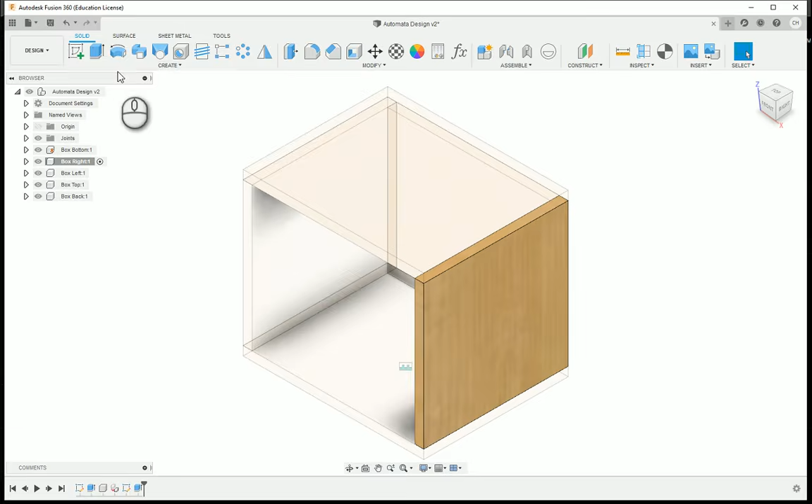So what I'm going to do here is find my box, and I'm going to say activate component, and I'm going to choose the hole command. From here, I'm going to select the side of the box. Now I'm going to turn to the right side here, and we have a diameter of 0.5.

What we're going to do is choose from our references. I'm just going to click on the edge. This needs to be 2 inches from the front, and then again, you don't want to go to the top there, you want to go to the top of the side piece, and this needs to be 2 inches. So centrally located in the side piece.

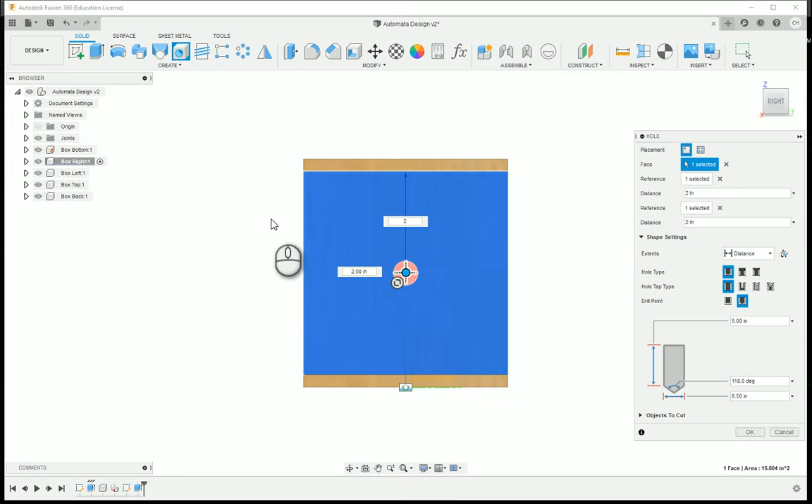And what I'm going to do here is, rather than say distance, I'm going to say through all, and it's actually going to end up, when you look here, going all the way through to the other side. So it's actually going to create a hole in the other component for us. And I'm going to say OK.

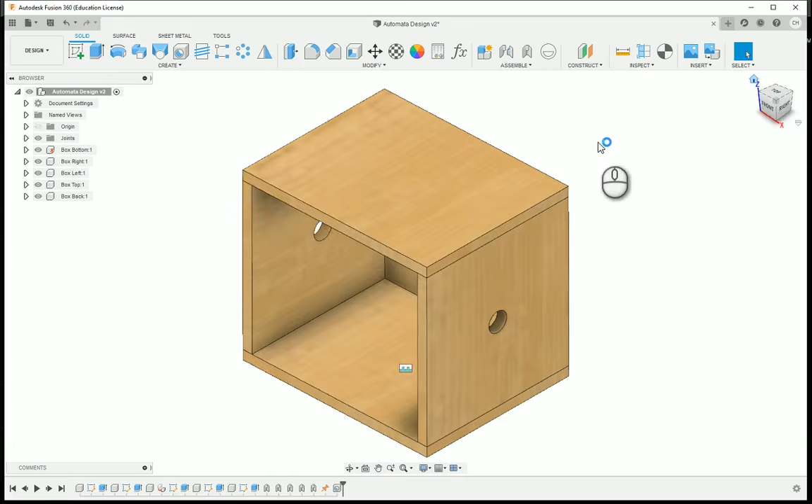So now I'm going to activate the top level. Here's our holes. And now I can start looking at bringing in some of our components we created. So let me open up my data panel, and I'm going to drag in the axle bushing and place it into our model.

I'm going to get this positioned. I like to get these positioned into place of how they would be assembled before I start doing any joints. That's because a lot of the snap points and everything, the joint origins will line up and everything's set up there. So I'm going to say OK.

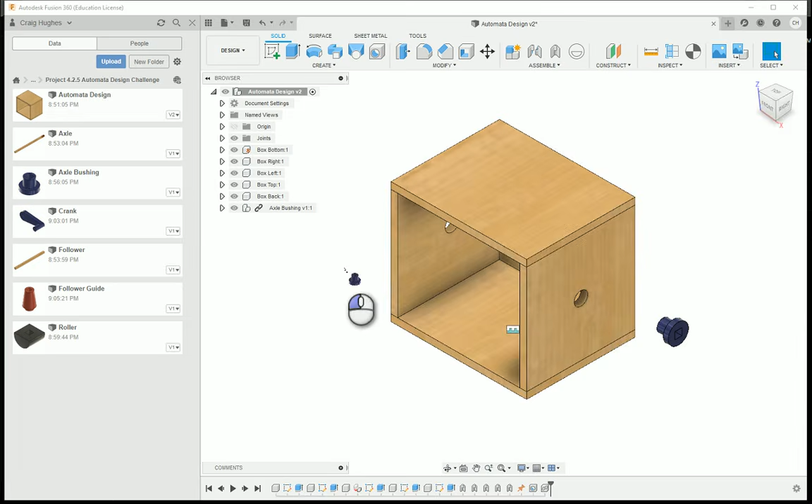And then I'm going to drag in another axle bushing. Now I can't move or copy in this file because these are separate design files. You're going to see this is kind of representative of a bottom-up modeling approach, because see the links there? That means these files were made in separate design files, whereas all the box parts are in one file. This is top down, and here this is going to be bottom up.

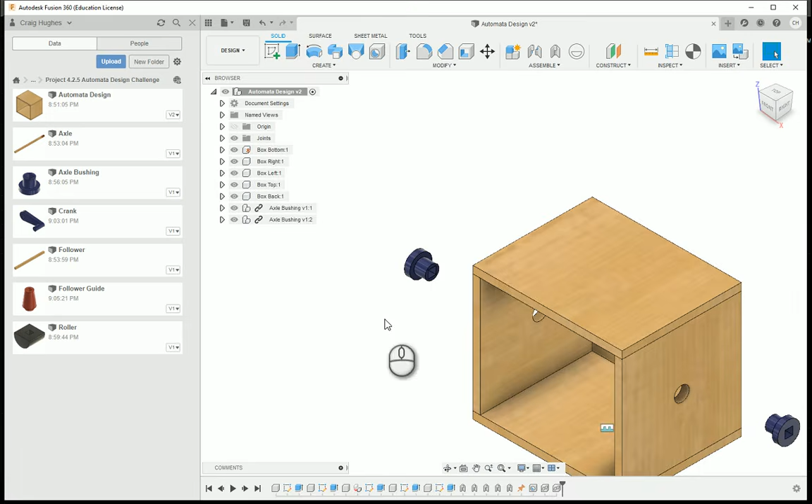So let's go ahead and try this out though. I'm going to do a joint, and I'm going to choose a revolute joint. Since these guys aren't put together, I don't want to use as-built joint. As-built joint is if I go through and model these in place where I want them.

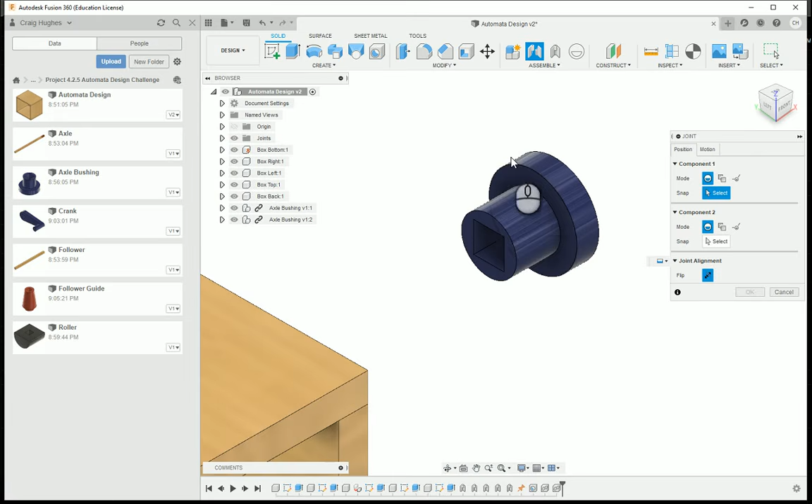For joint, I want to go ahead, and these are parts that are not put together. So I'm going to select kind of this black circle around the outside edge, and you'll see the joint origin chip will show up right there in directly the center of the hole.

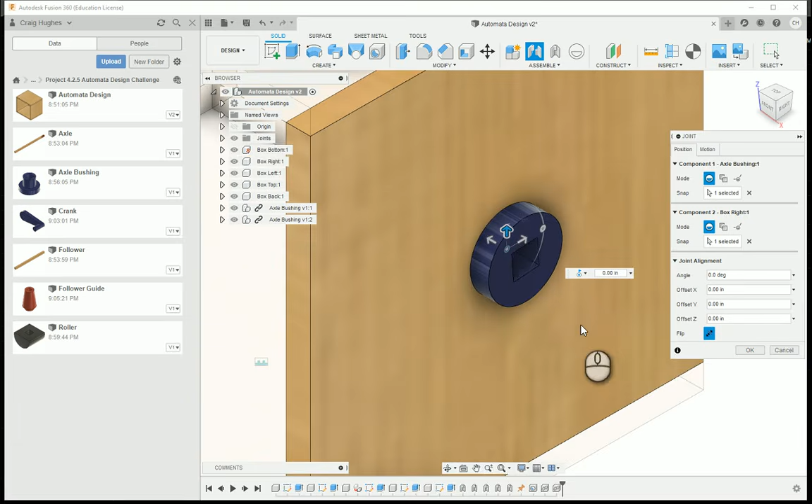And then what I'm going to do is I want that to be clicked right here, so then that goes. Now I'm going to change the motion. Either I can click on the tab in the dialog, or I can click this little shortcut menu, which I like to do, and I want to change that to a revolute joint. And I'm going to go ahead and say OK.

And I'm going to do the exact same thing with this axle bushing here. Choose the circle right around there, choose the outside edge. It's already going to say revolute joint, and we're going to be able to have that going.

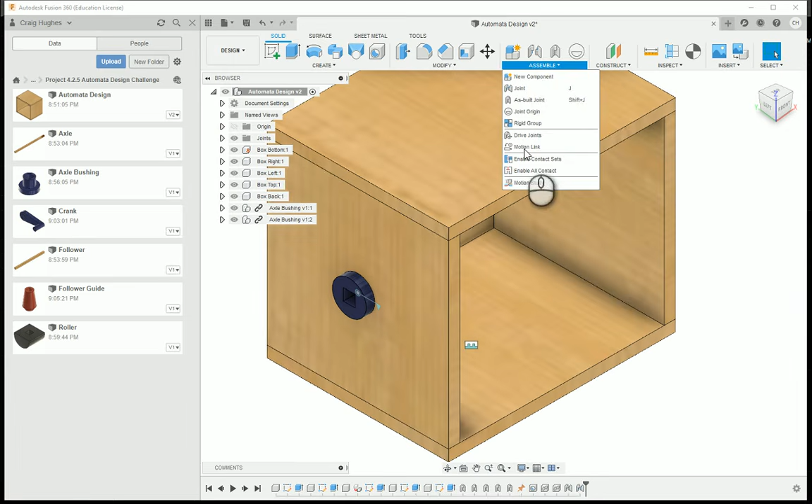And I'm going to say OK. Now, one thing I'm going to do while we're at this, before we forget, is under Assemble, I want to motion link these two revolute joints.

So I'm going to go ahead and click that revolute joint. I can click on the icon, or I can expand the folder and select the two right there. That way they're going to be turning in the same direction.

But you're going to see they're not necessarily, because they're flipped to each other. So a motion link may not be the best thing, but our axle is going to be brought in and going to help fix that for us.

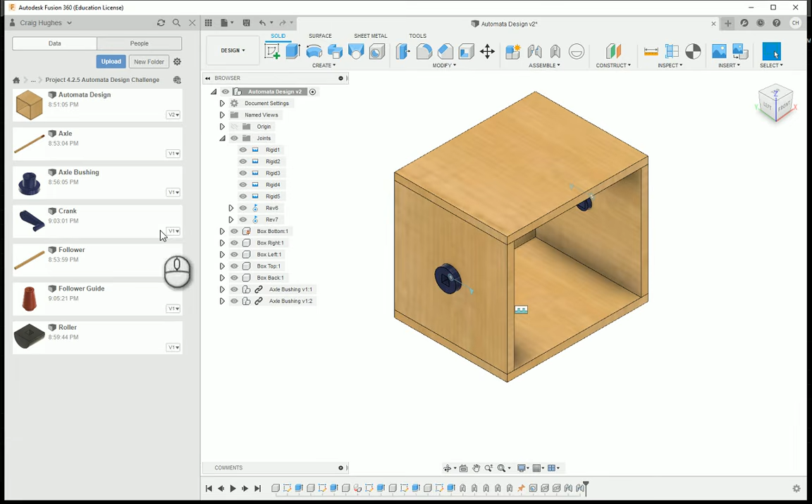So I'm going to go ahead and drag that in. Drag the axle in. Again, I want to kind of position it in the orientation that I'm going to install it. And I'm going to do this.

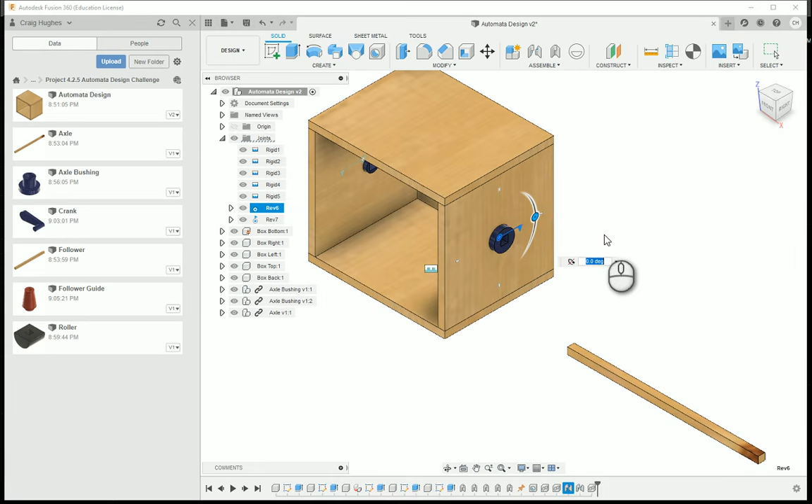Okay, so one thing I want to do with these revolute joints is make sure they're set at 0 degrees. That one looks good. I'm going to hit escape. This one looks good too. So you can click on any of the joint icons and edit them as well.

So what I'm going to do here is choose the joint. I want to choose the end point, let me do that one more time. I think the video, here we go. So I want to choose the very end point.

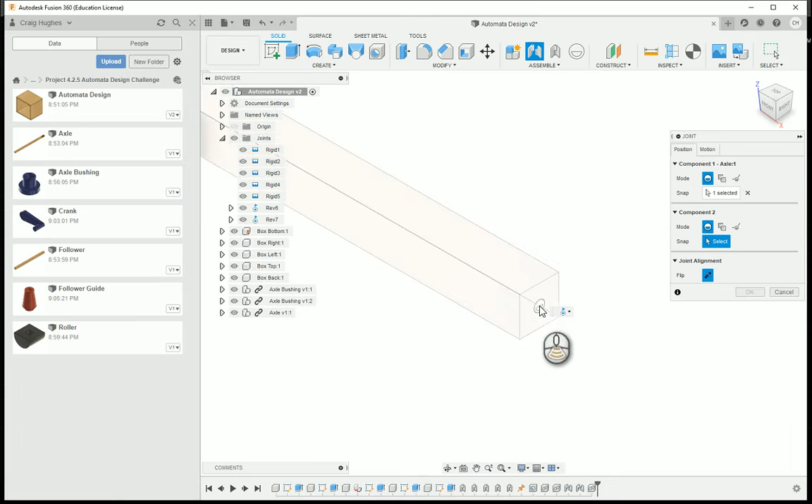You're going to see these little joint origin points, and I want to choose the very center on the end. I'm going to zoom out and find that on the hole. If I hover over this face, you'll notice as I move to the hole, it wants to try to pick these inside faces. I'm going to hold the control key, and that's going to lock down, so I can only pick these selections I'm kind of cycling through.

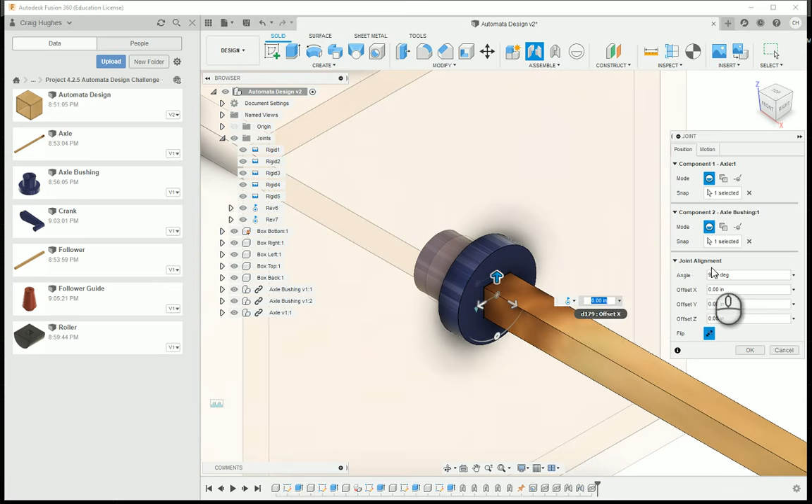And I want to find the corresponding one, which is right in the middle, and I'm going to go ahead and put that in there. Now you're going to notice I really don't want a revolute joint, I want it to be rigid. Now you'll see the axle is not inside, so I'm just going to hit the flip button and kind of flip that.

Now I'm going to turn this to the front before I accept it. I really want to make sure this is kind of even on both sides. So I'm going to go ahead and kind of drag this over.

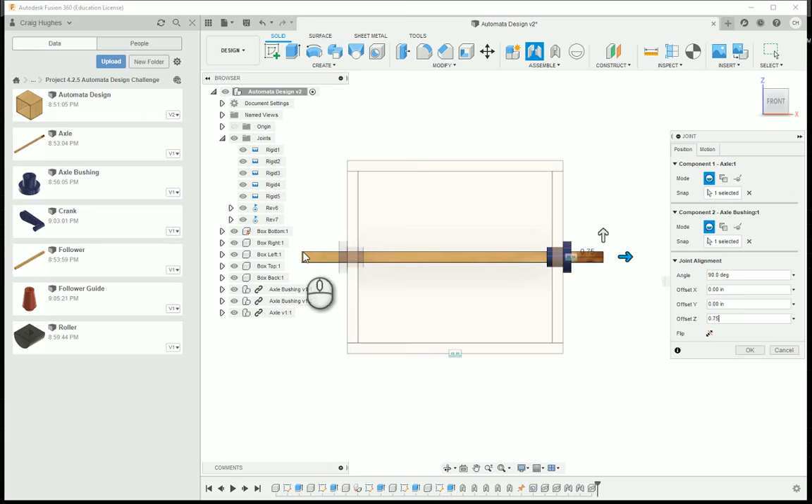I'm going to do an offset, and the offset usually I think is about 0.75. You can actually put in a little bit more. And actually that's not quite exactly even, but we can always adjust as well. And I'm going to go ahead and say OK.

So now here's what I can do: if I click and drag on this, you're going to see this one and this one are going to turn together, and then anytime I drag on the axle bushing, the axle turns. If I drag on the axle bushing, it will turn.

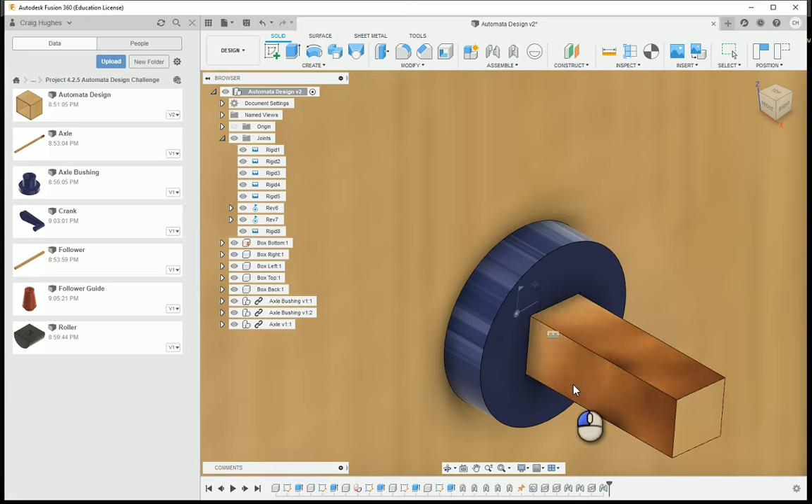So you'll notice that. Now let's go over to the other side. You'll notice it's not following with what we want. So here's the thing that I'm going to do.

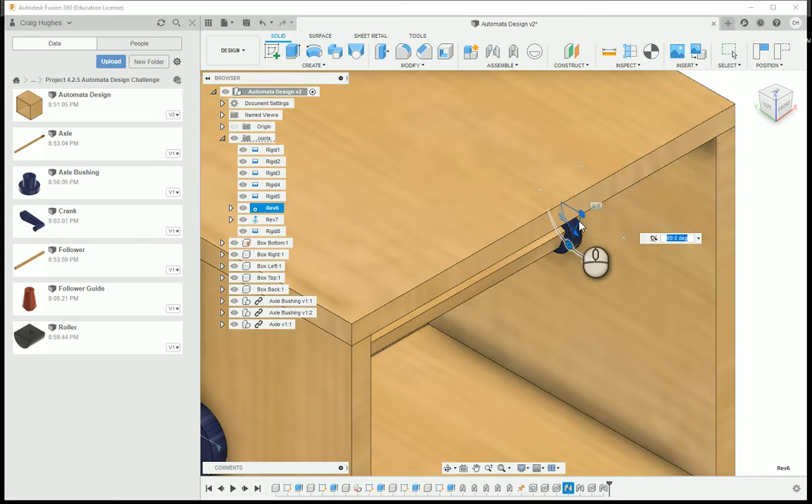Let me go ahead and set the 0 position for the revolute joint, and let me go over here to this one and set the 0 position there. Now here's the easiest thing to do - this is kind of doing a combination. Let's do the as-built joint.

Rigid, this axle bushing and the axle, and we say OK. Now you'll notice when I turn the axle bushing, these guys are stuck together, just like the other side. So it made it real easy for us.

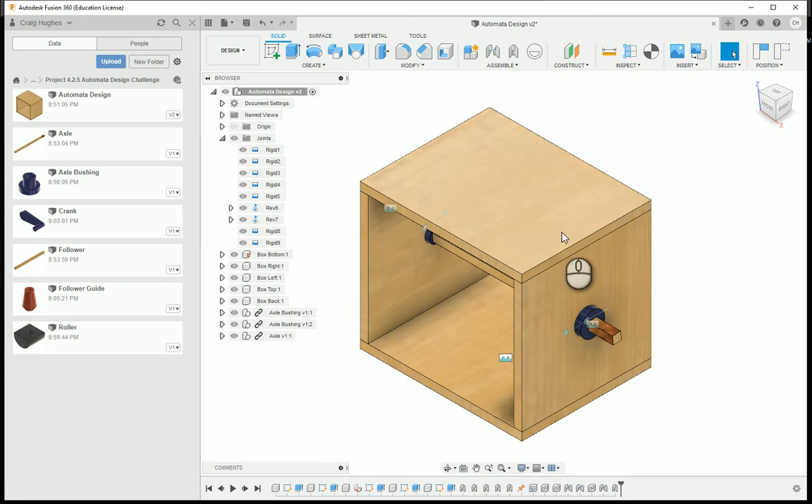Alright, so there's where we can go through and get that going. I'm going to go ahead and drag in also my crank handle, and it may take it a second to process to put the crank handle in. Let me go ahead and drag this in, and let me get this into the proper position.

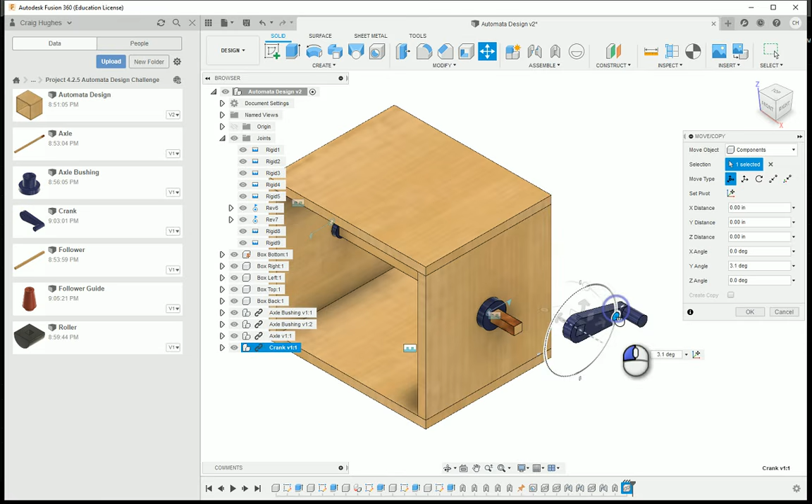The way I want this is I want the crank handle, when it's installed, to be in the lowest position. So I'm going to do it like this. I'm going to say OK. And here's what I'm going to do - I'm going to joint.

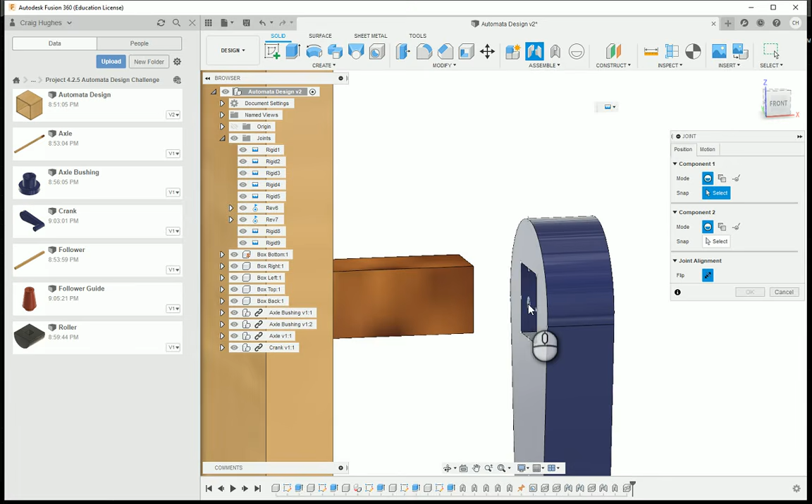I'm going to go ahead and turn this around, because the face that I want is actually this face. I'm going to hover over and choose the center of the hole like I did before, but I want to choose that back face.

So you'll see where the joint origin chip is, and then I'm going to go up here to the axle bushing. I want it to be right up against there, and even though the axle's in place, you can see I'm kind of snapping to the center. I want to click that same spot, and now that's going to put it right up against the axle bushing and go from there, and I'm going to say OK.

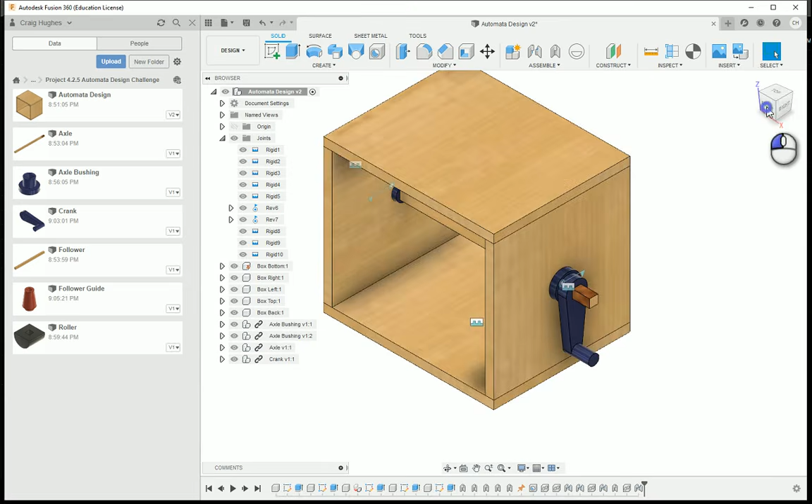So now here is our particular axle bushing and everything like that, and here we can kind of get a little bit of an idea of what we have.

Now 7 inches is probably a little bit too much on the axle, so I'm going to measure this, and see, okay, what's from this point to the outside edge on that point. The only thing is it gives me a diagonal line.

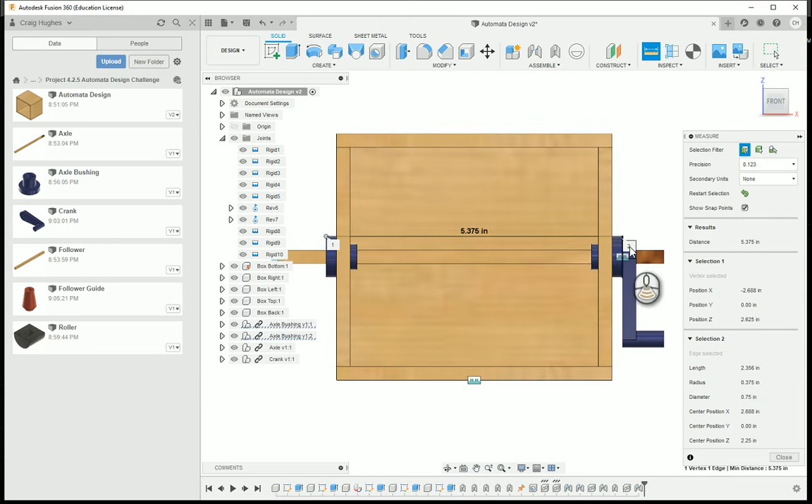So let me restart. Let me click this corner, let me do the axle bushing, and I know it's 5.375, and then I need to add a quarter of an inch to that. So if I want this to be sized up perfectly, let me go ahead and hit close.

5.375. Let's open up - not the crank, let's open up not the follower - let's do the axle. I guess it's getting a little late.

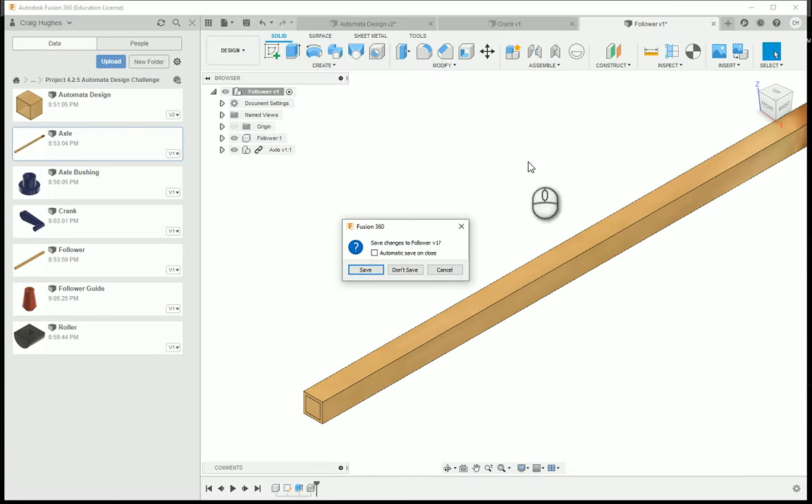So what we're going to see here is I'm going to change the extrusion edit feature instead. Let me look at the axle. There we go. And it says 7 inches - 5.375 plus, and then let's put 0.25 in there, and let's say OK.

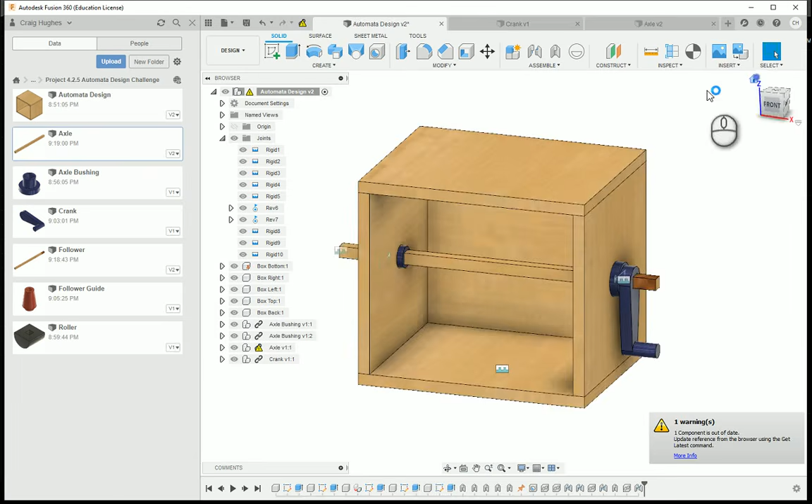And then now let's go ahead and save, and then let's go back to this Automata design file. Now the only thing is that it does need to update, so I'm going to say get all latest.

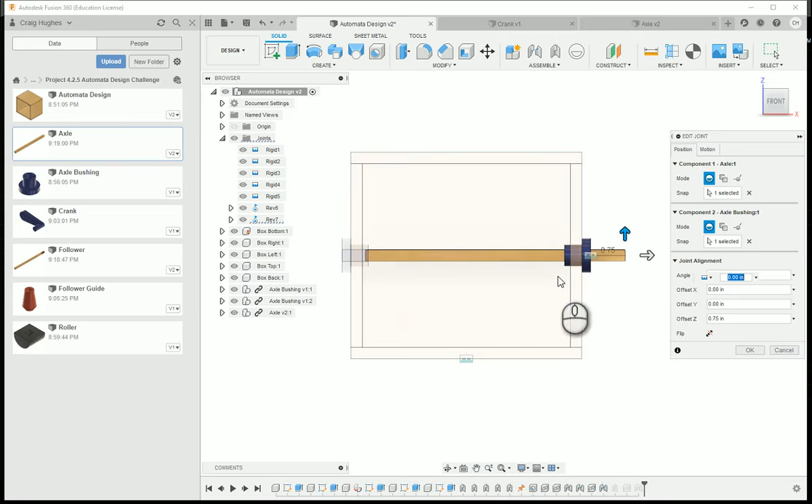And now here's the only thing - I may need to go through and make an adjustment, because now it's shortened it. So let's look at that rigid joint that I had placed earlier. Let's right click and say edit joint. There was an offset on that one, but it was probably rigid 8. Here we go. So now let's do an offset of 0 and say OK.

Looks like I still need to do a little bit of an offset, probably about a quarter of an inch. Say OK. There we go. So now our axle's all set up in place in the exact way.

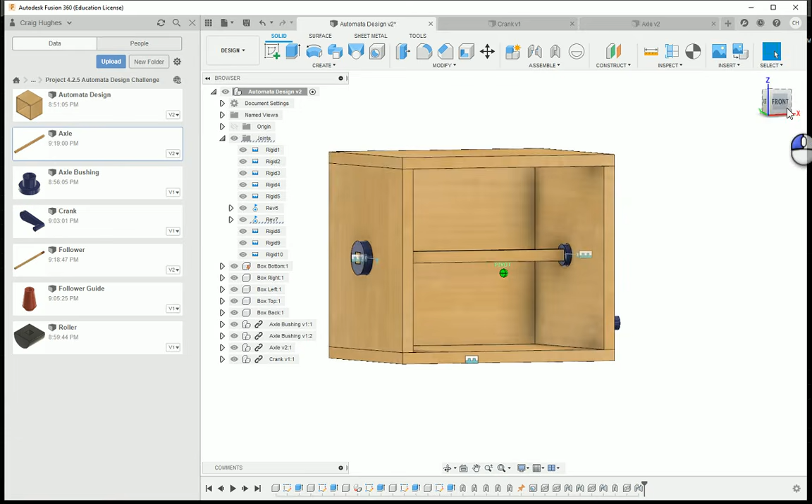So if you're wanting to edit components, modify them, that's how you can go through and do that in your Automata design. At this point, we're going to finish the video and take a look next at adding in some other components, such as the follower guides, holes in the top, things like that, and we'll continue on with the project.